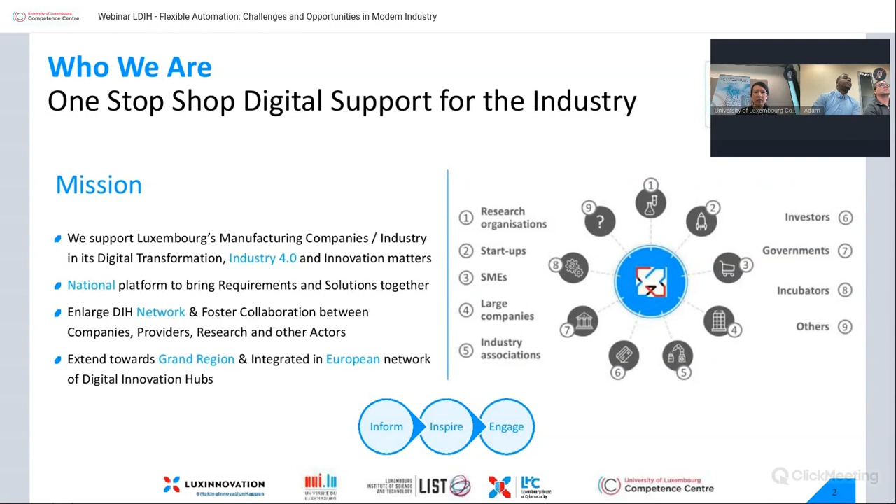Here we go. These are the list of services that we have in the LDIH project.

We have the digital maturity assessment, provided by the University of Luxembourg. We have the cybersecurity maturity assessment, provided by the Luxembourg House of Cybersecurity. We have the digital skills assessment, provided by us, the University of Luxembourg Competence Center.

We have the digital roadmap support, provided by Luxinnovation. The investment support is also provided by Luxinnovation. We have the digital industry training catalog, which we're going to show at the end of the talk.

This is provided by us, the University of Luxembourg Competence Center. We also have the test-before-invest facilities catalog, provided by the research institution LIST. And we have the LDIH marketplace, available at the website dih.lu. So let's see our speakers.

Now you have two cameras running. Yes, I'm... convenient, you have to mute yours. Okay, I think we are ready now. Okay, can you hear us very well?

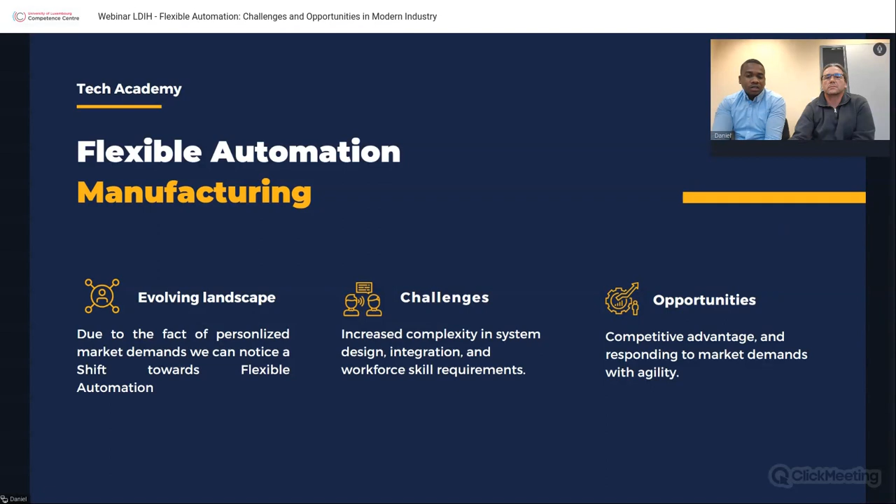Some years ago, not long ago, we started seeing a shift in how we think about automating processes. Point number one, I think, belongs to the past, where machines were designed and built to process only one, two, or three types of products maximum—where high volume and low mix was the norm.

Nowadays, as we've worked on these types of projects, we're seeing a shift—we're making automation much more flexible, where there's high mix and low volume production. You can process different types of products on one machine while still keeping control over your products. The future is uncertain, but surely it will be through the digital way.

I believe it's largely due to personalization—customers now have more personalized demands for certain products, and that raises demand for high mix and low volume. I believe that's the case. Also, the market nowadays is much more competitive.

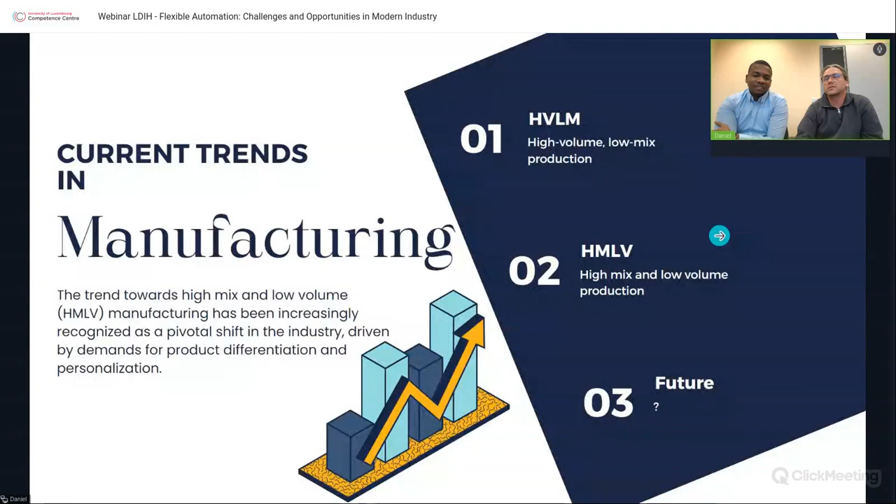We are being compared to many other companies, many other countries, continents in this case, and we have to be competitive. We need to be very flexible on this.

Here we're talking about the difference between small batch production and mass production. Conventionally, small batch production focuses on producing limited quantities, offering benefits such as customization to meet specific customer needs, higher quality control, and lower startup cost. That's debatable, but in some ways yes, the starting cost in small production is not that huge.

Depends on the product again. For mass production, it's a convention where you have a production line mainly producing 1, 2, or 3 types of products. It's quite rigid, but the cost per unit is quite low, meaning it's cheaper in terms of final products, but the starting cost is quite high. When companies choose between those two, they have to consider the budget, the cost, and the type of product they would like to produce.

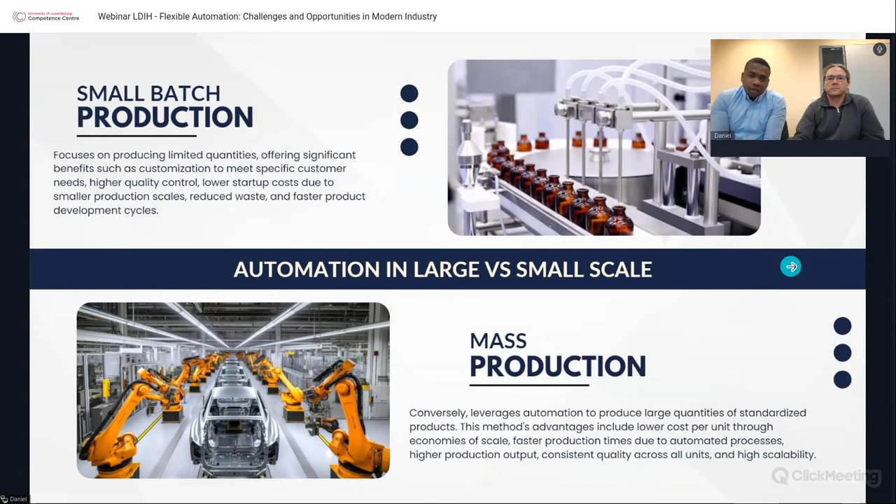Additionally, I believe digitalization has helped us a lot to achieve flexible automation and the ability to produce different types of products on the same line or different lines. For example, we have the SAP system, the ERP system, the digital twins. These are all features of digitalization that help us move from one production order to the next without losing data and without downtime. Sometimes it's just a click to change the planning of the production. I believe this has enabled us to reach a new height in production, increasing the efficiency of your production side.

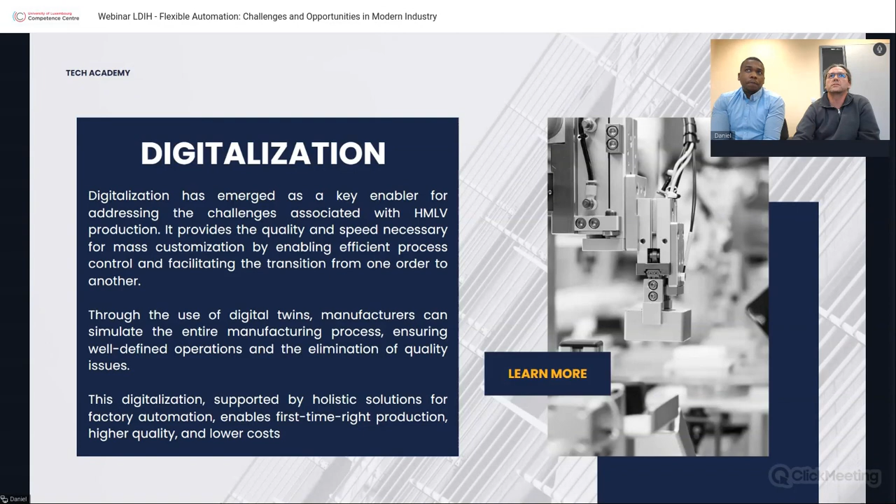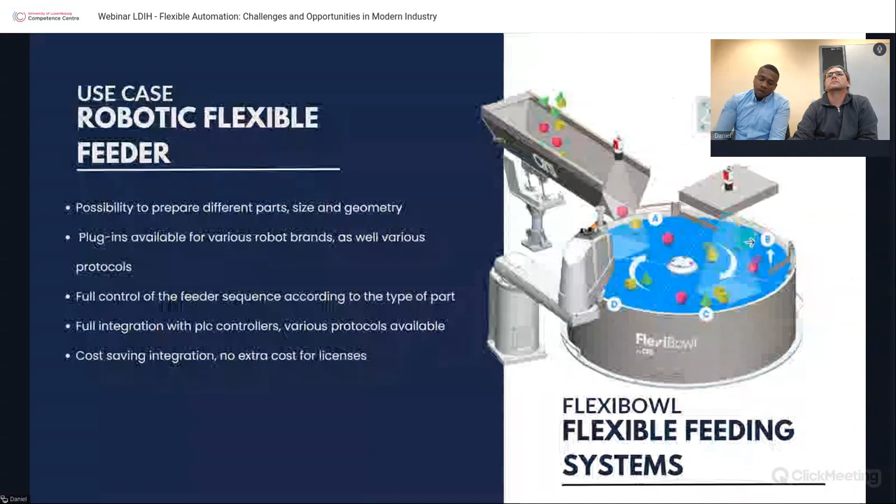The only difference between the two systems is that the previous one is rotary, allowing it to rotate, so the parts fed into the rotary flexible feeder will always come back under the camera in order to be inspected. This means those parts will always return under the camera in a rotary fashion, giving you the possibility to pick them up eventually, maybe after 2-3 runs.

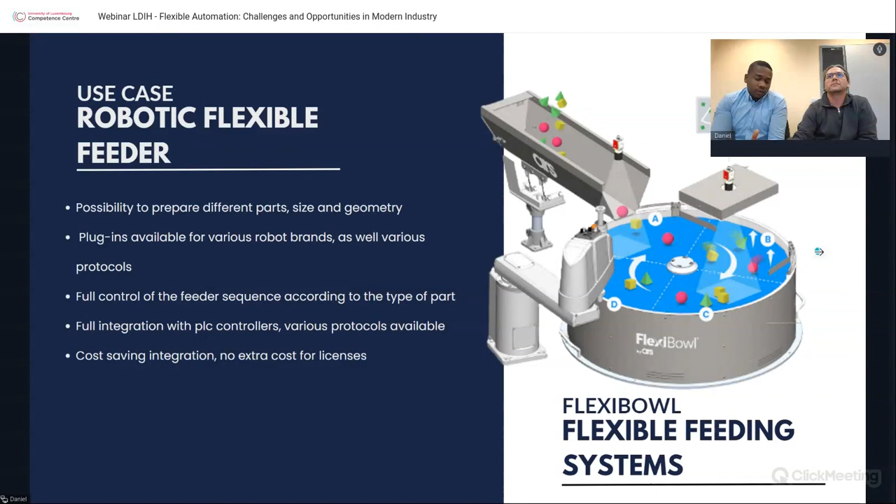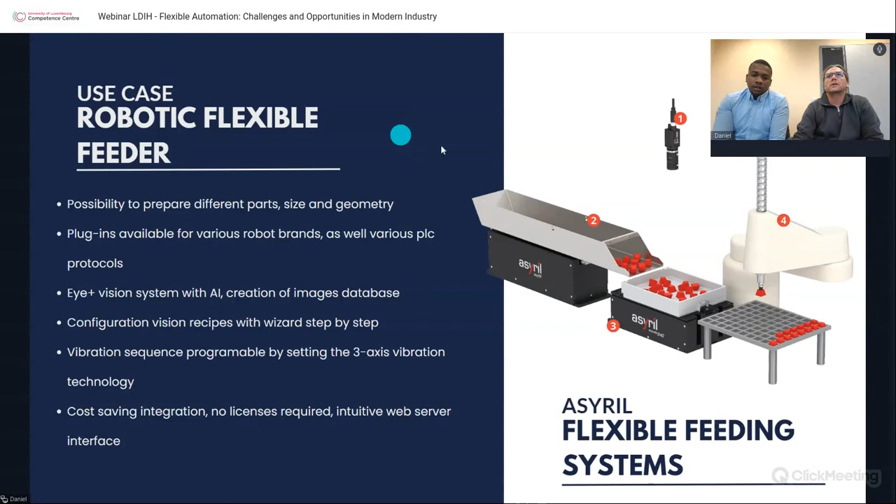Next, this is a use case where we will utilize that type of flexible feeding system. I'll briefly explain the project and what the outcome is supposed to be.

As you can see on the left side, we have different types of caps and cork systems, and the idea is that we would like to assemble those caps and corks together. You also see the finished product with the bottles, which is small, but that's the finished product. These are not the full range of cork types we're feeding into the system, but that's what we have for the moment to show you.

We can break this project into four parts. We have the cork feeding system, the assembly line feeding system, and in the middle the Mikron machine where you're actually assembling the caps and corks together. Lastly, we have the work rest station where you're feeding the caps with the work rest that carries the caps. We'll see that in more detail.

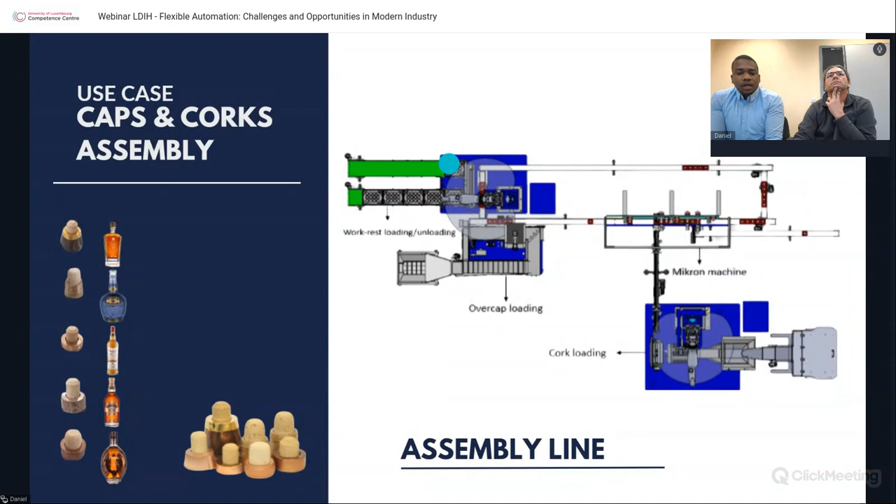If you look deeper into the cork feeding system, what you see is the elevator, which brings the corks into the hopper and then the vibration tray. The vibration tray vibrates in a specific configuration and sequence in order to rotate the corks into a desirable, pickable orientation. The original plate that came with the Asyril was actually flat.

The problem with that is once the corks fall into place, they keep rolling. So if you snap a picture, they could be in the right, pickable orientation, but they keep changing their coordinate position, and that is a problem. For that, we had to design different types of plates with grooves that allow the corks to fall into place.

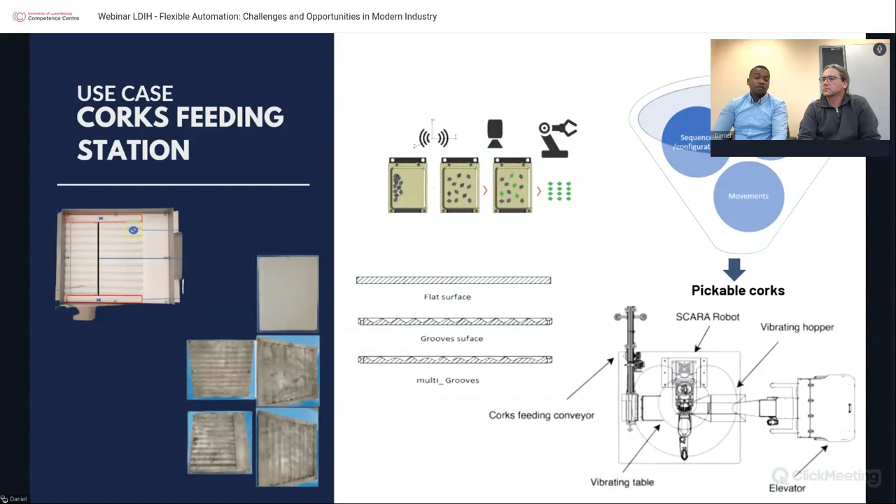That also helps because different types of corks have different sizes and dimensions, and we needed to design 5 or 6 types of plates to accommodate them. We also had to change and play with the type of motion and sequence in the Asyril in order to achieve a high output of pickable corks in front of the robot's camera. Without that, we didn't have enough parts presented under the camera that were actually pickable for the robot.

Next, we're going to see a video that shows you the final project.

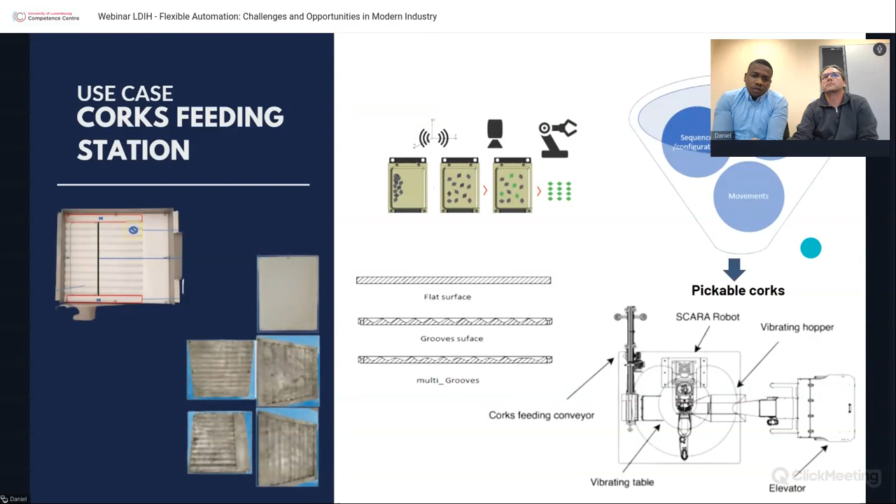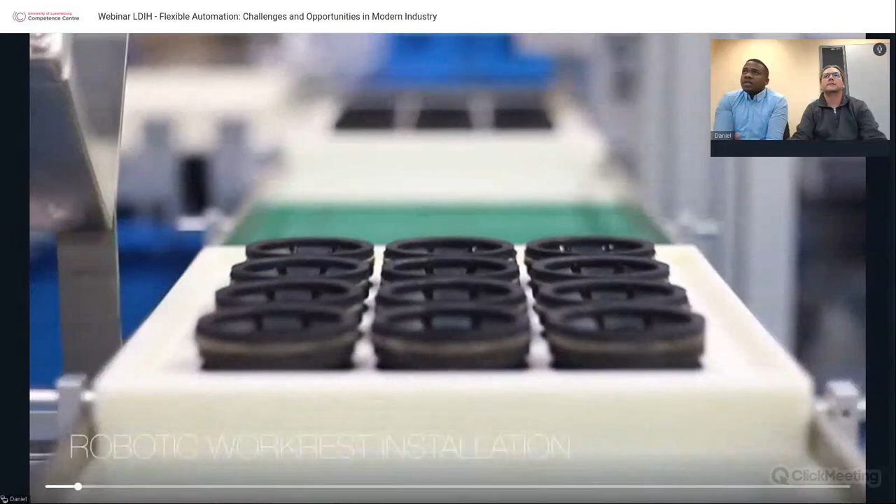System, and then we take the workrests and place them into the carrier.

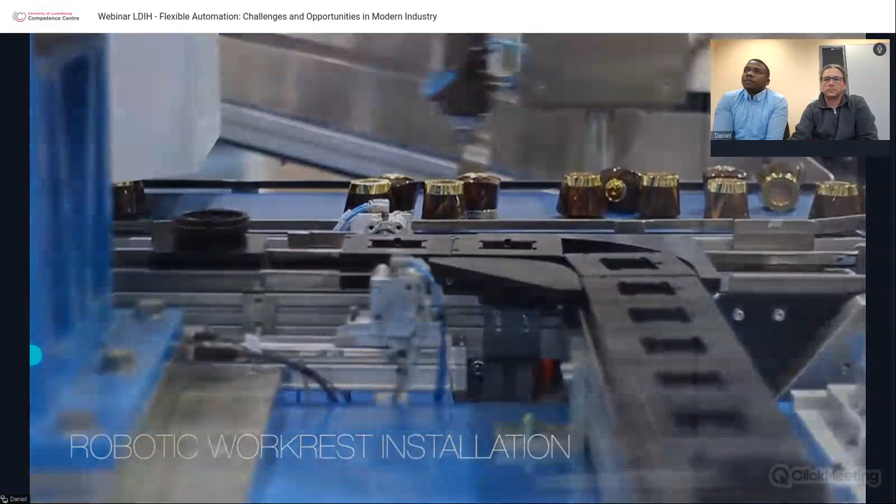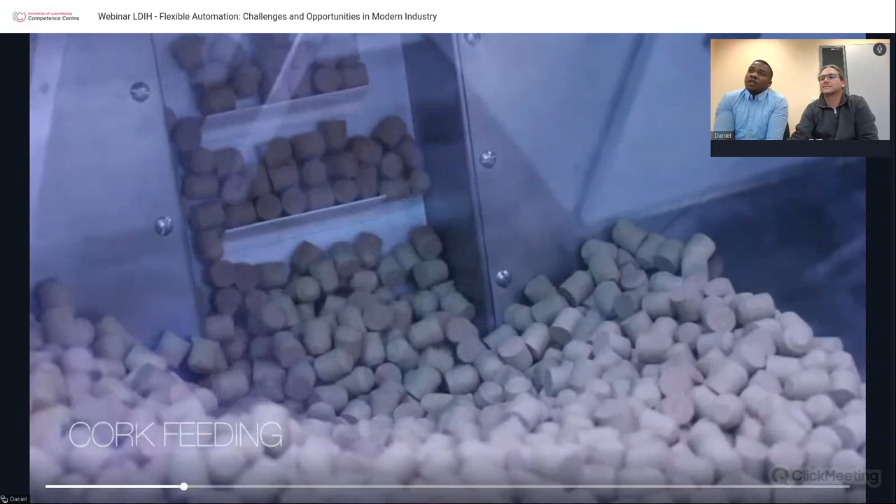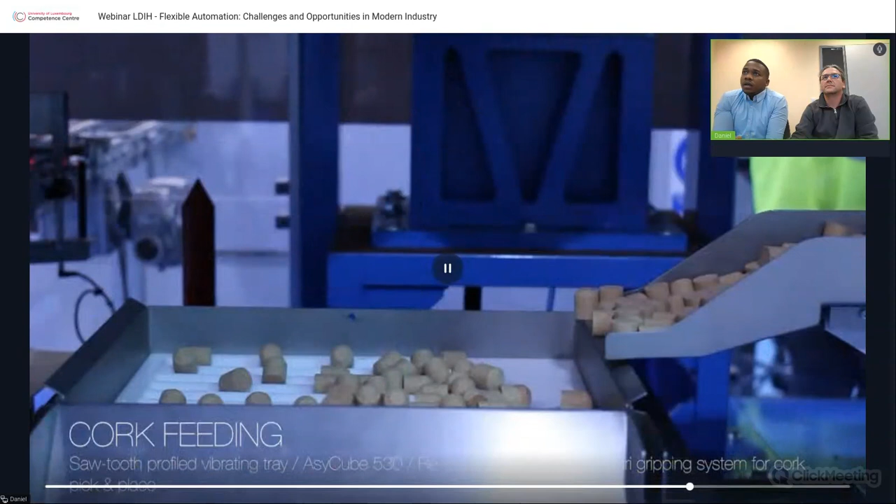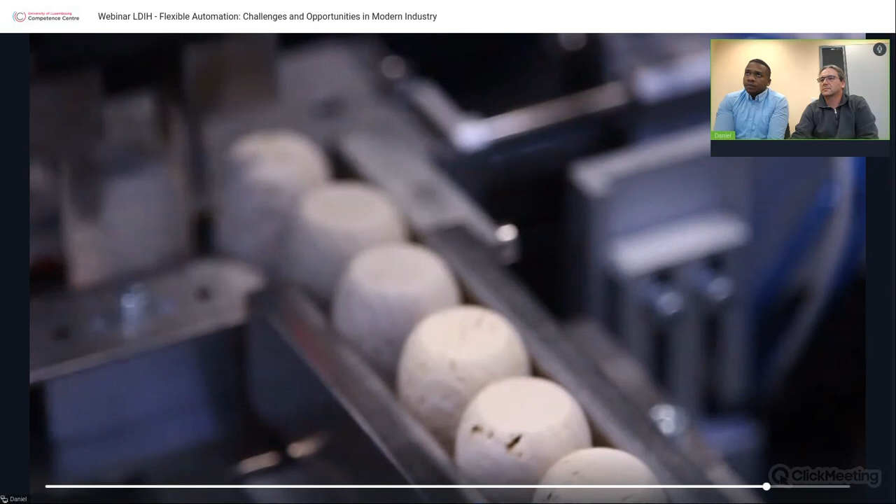Here we have the elevators transporting the corks into the vibration tray. The tray vibrates in order to bring the corks into a pickable orientation. The robot picks up the corks and places them into the revolver. The revolver then pushes all the parts into the Mikron machine, ready to be assembled with the other parts. On the other side, we have the caps, and an elevator that brings the caps into the conveyor.

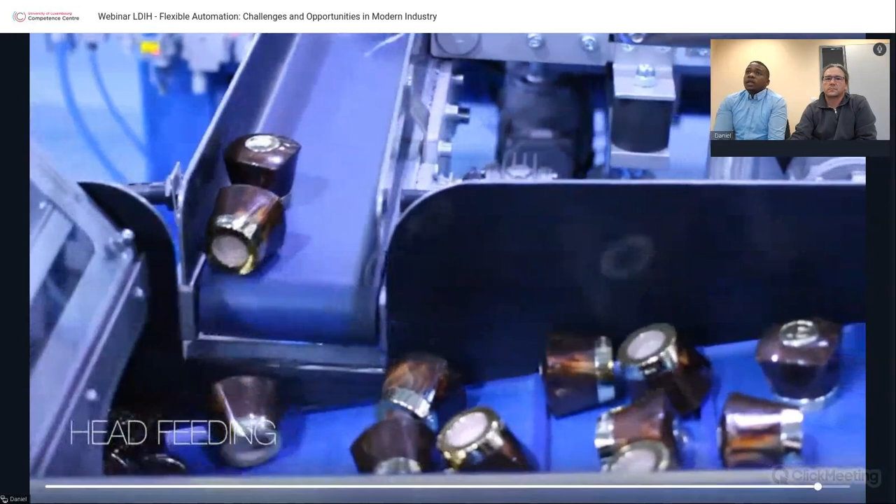Once the caps are under...

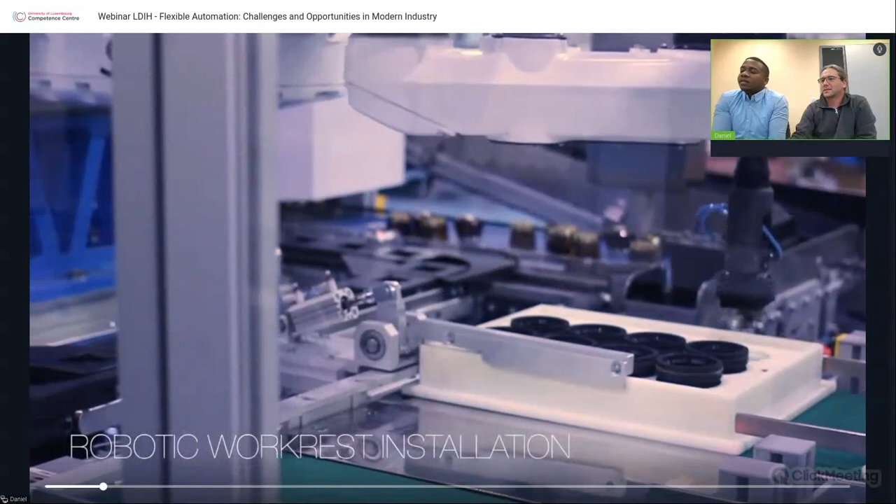Oops, yeah. You were started, no? Yeah, let's just start from the beginning. We're sorry for the inconvenience, something happened there, made it restart. Something is happening with the video, it's lagging, I believe.

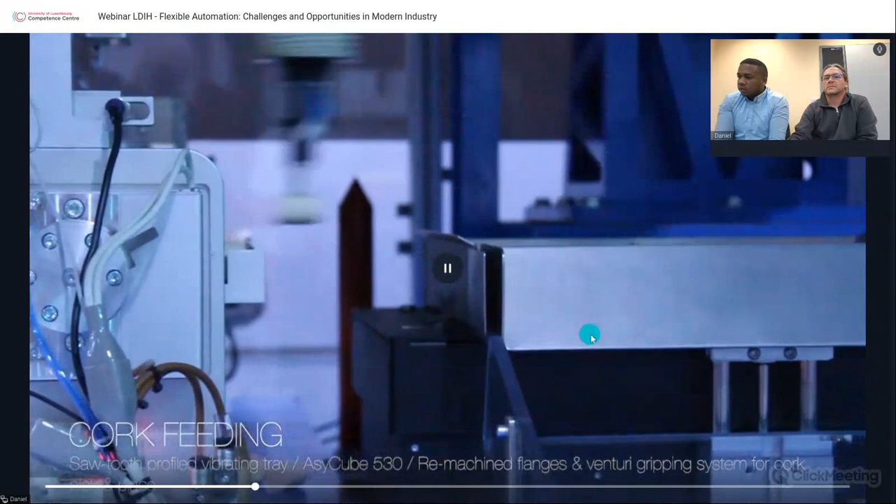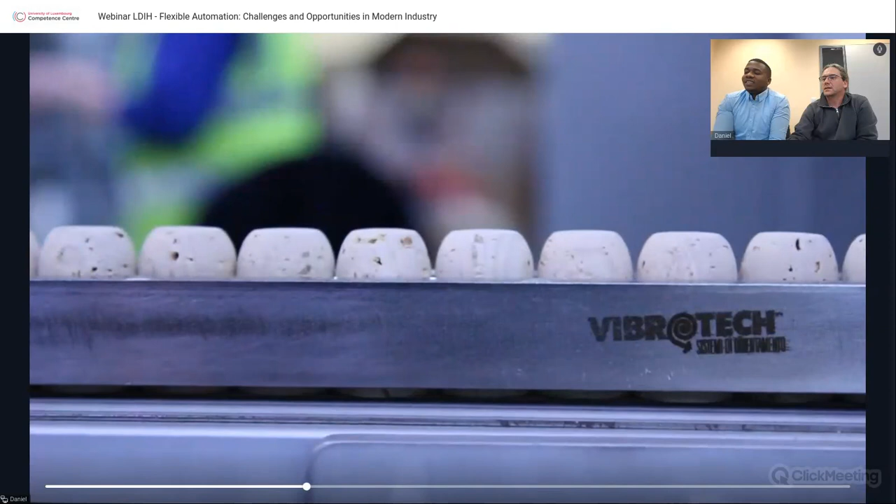Get to the cap station. I hope so. If not, we just carry on.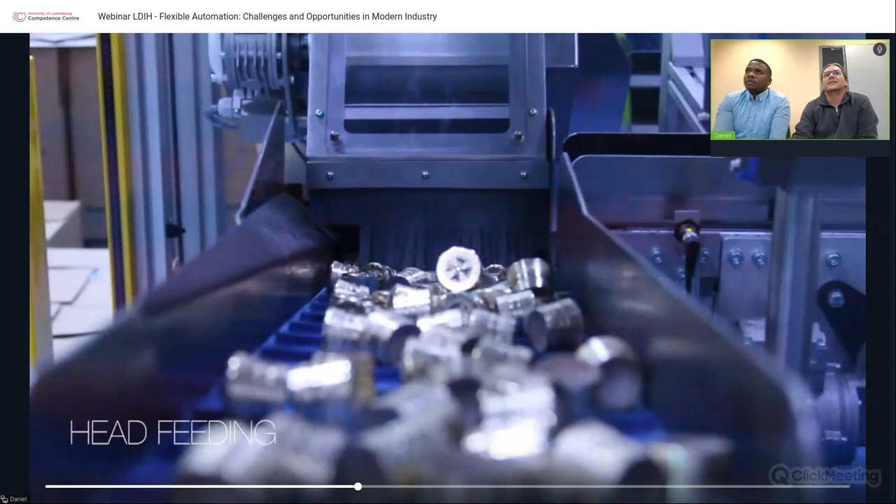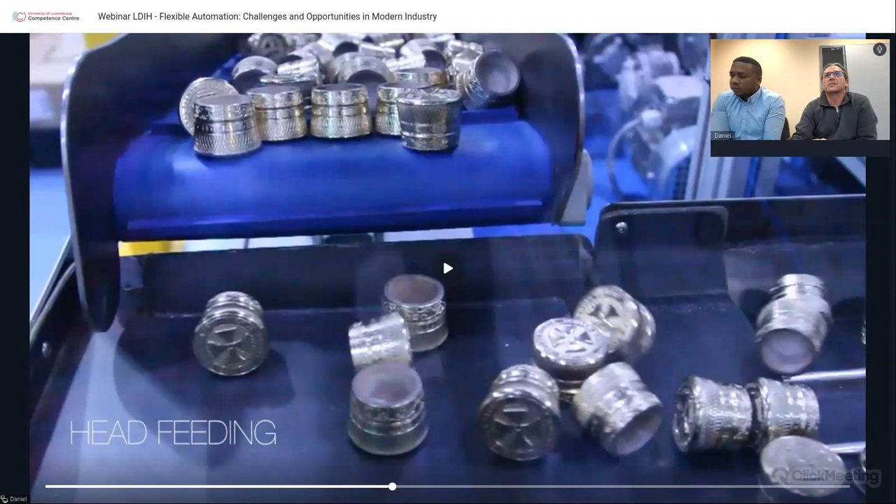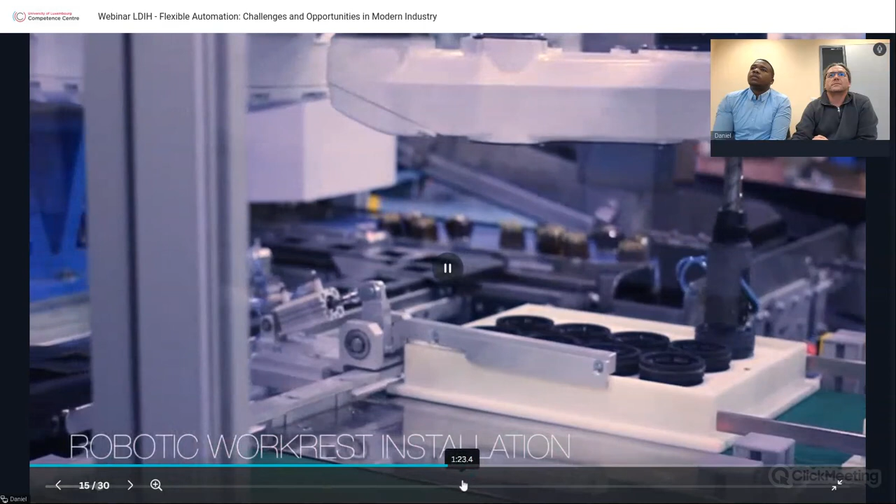No, yeah, for some reason there's definitely a problem with the video. We will try to play it back again at the end of the session. Exactly. That is for some reason, yeah, it's that. Video we can, I can. Okay.

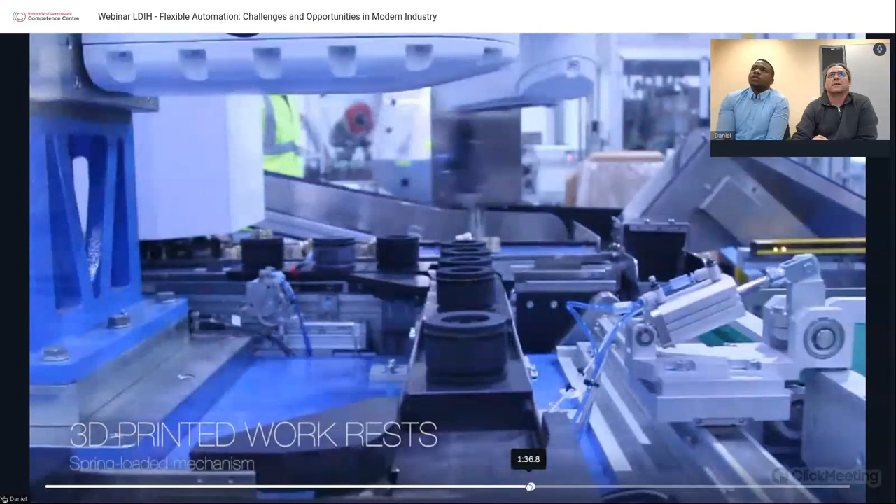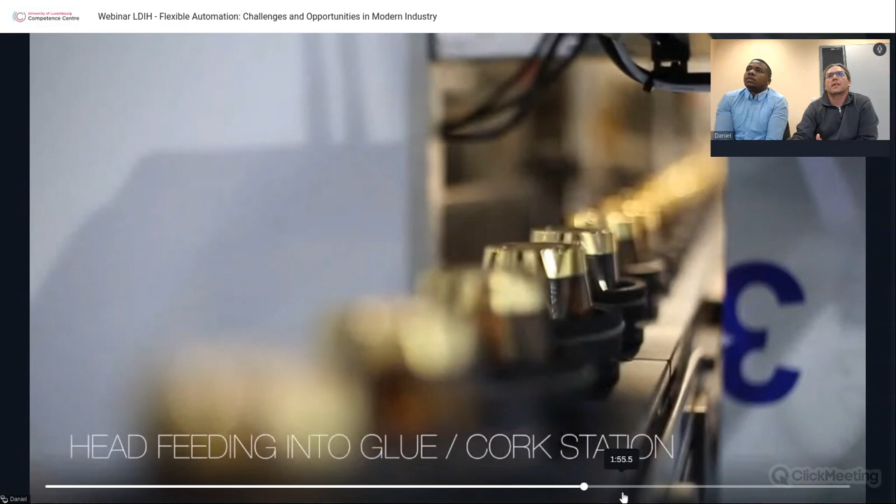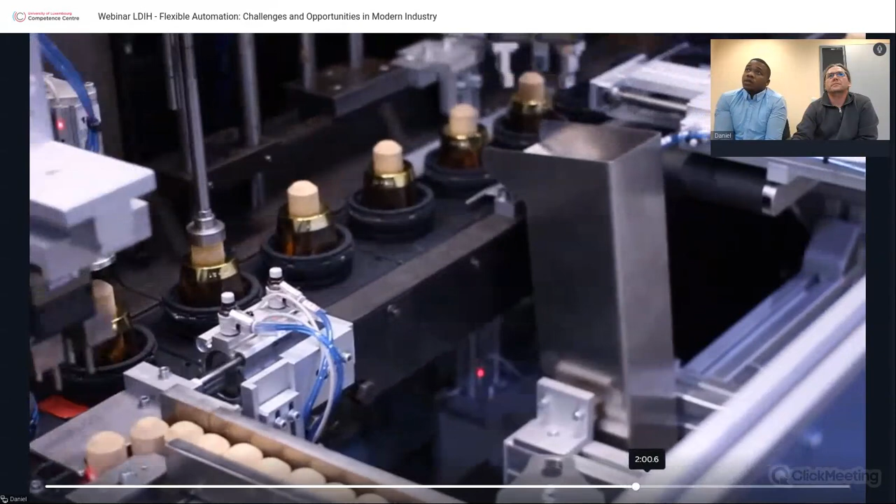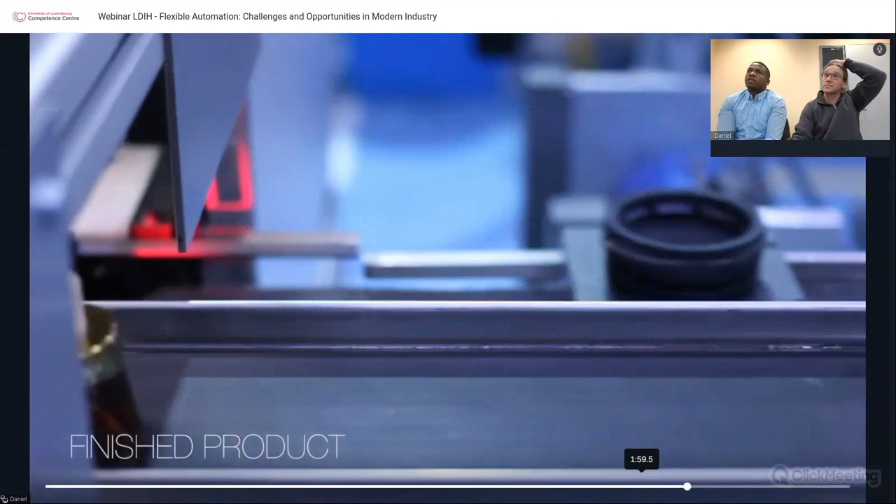Sorry for the inconvenience with the video, but yeah, we can change. Well, let's see if we can proceed to the next slides. Yeah. Dun, dun, dun, dun. This one. Okay. All right.

Yes, we are. So in the next slides, I'm going to present a project, I think the latest project that we worked on when we were at Guala. This is another flexible feeder that we developed with Guala for our headquarter company. This machine is actually running in Alessandria, the headquarters of Guala. We already witnessed this year that this machine is still running, so we did a good job, I can say that.

But before celebrating so much, I'm going to give you highlights of what were the specifications to build this machine and how we based the design of this machine. So this is this flexible feeder. Its main goal was to process high mix, low volume, as we already discussed before.

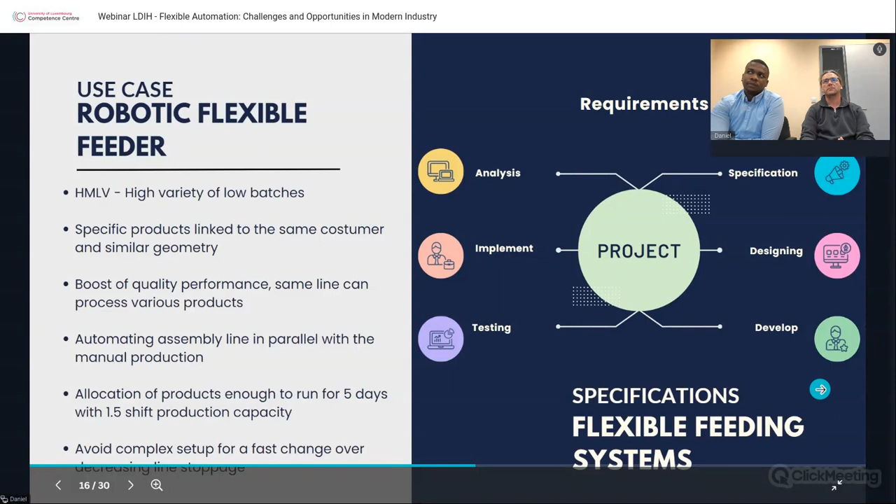So the analysis from the requirements given to us is that all the products were round shape, of course with different weights. Some of the products were plastic, others were made of Zamac, a kind of metal alloy. The internal depth was varying. So we needed the robot to have the flexibility to understand what kind of product was to be picked, and what kind of tool we had to find to pick this group of products.

So we came up with two solutions. One was a gripper with 3 fingers, and the other was a vacuum. Why couldn't the vacuum pick up all the products? Because the suction cup was not small enough to enter inside all the products. Some of the products had an internal diameter smaller than the diameter of the suction cup. On top of that, we had to select a special suction cup due to the roughness these cups have internally.

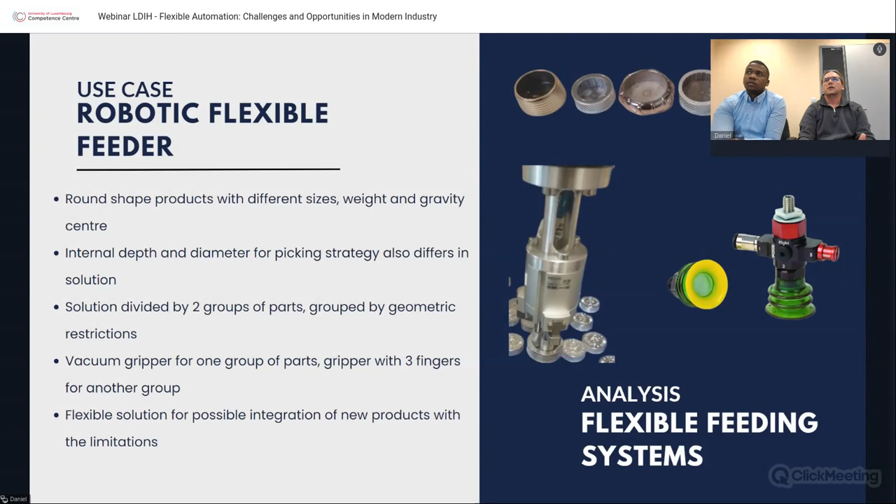And the solution is, we're going to see in the next video. No, not yet, sorry. No, go there.

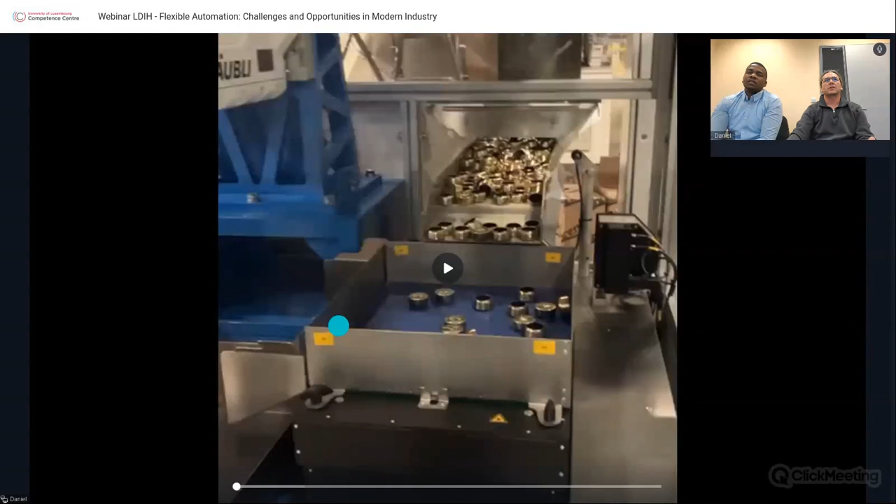So the solution we came up with was the layout of this flexible feeder: we have a robot in the middle with 2 parallel feeders, where the robot can pick from one of the sides, while at the same time the other feeder is preparing the parts to be pickable. So when the robot finished one of the sides, the other feeder was ready to be pickable. In this way, we could achieve a rate of 45 parts per minute at maximum.

With ideal conditions, we achieved these 45 parts per minute. To reach 60 parts per minute is very challenging, as you'd have to pick 1 part per second. So it's something we sometimes think is feasible, but even with the fastest robot we implemented here, it was not possible due to various constraints.

We choose to use one of the Asyril solutions. This type of feeder could help us customize each product, customize the vibration of the platform. At the same time, it came with an integrated vision system with AI.

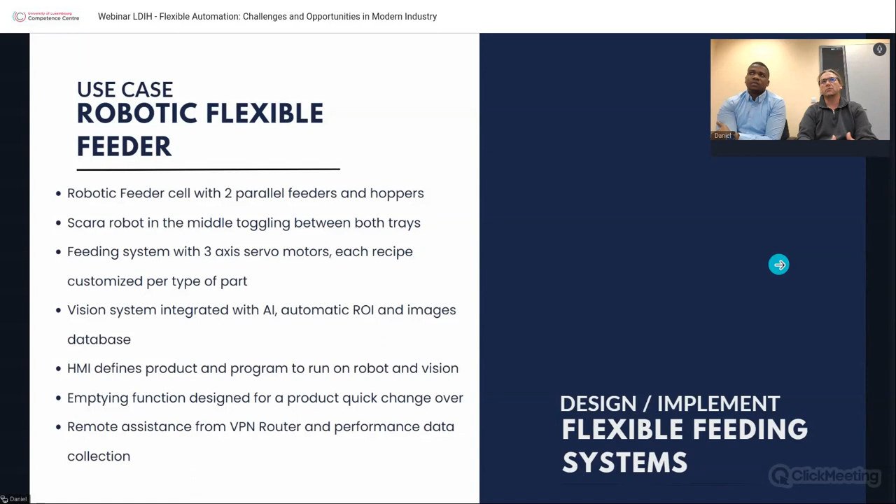The next video will show you the solution for caps.

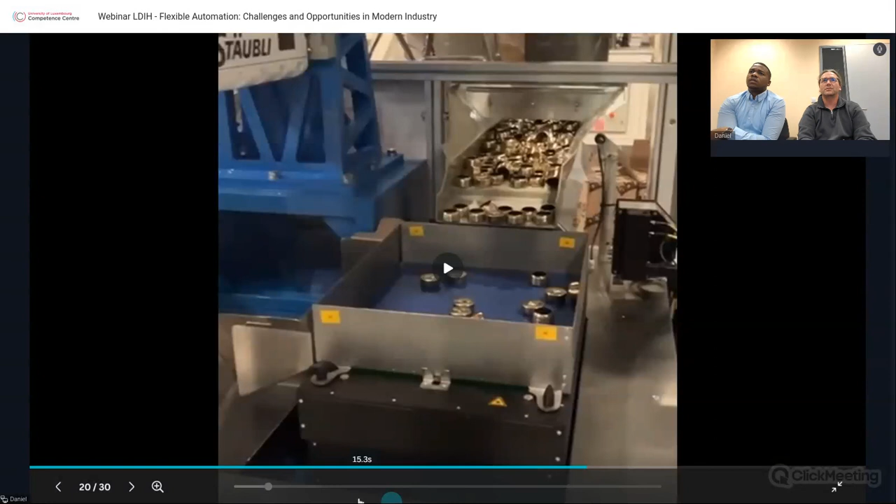As you see on the right side, you have this Asyril. It's stopping for some reason, I don't know why. He wants to play with us.

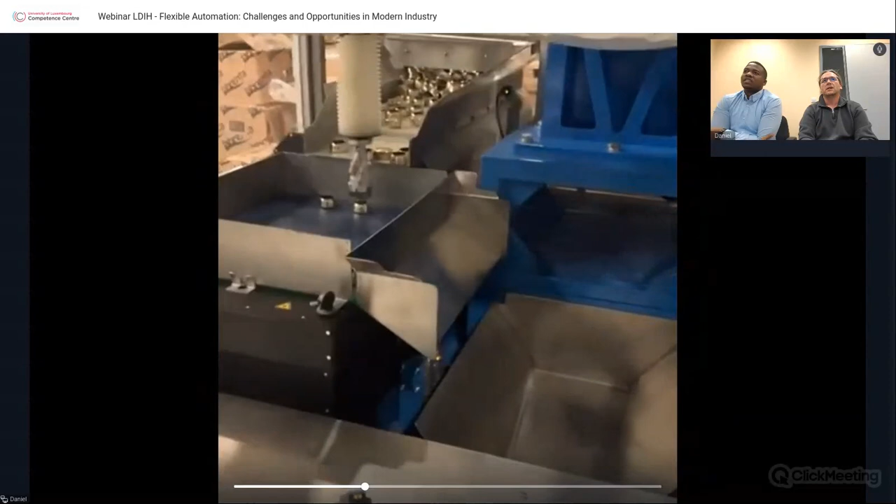On the left side, this was already prepared while we were picking on the right side. So once it picks all the parts available on the left side, it goes to the right side because they were already prepared in advance. Now we cannot see it, but the left side is being prepared.

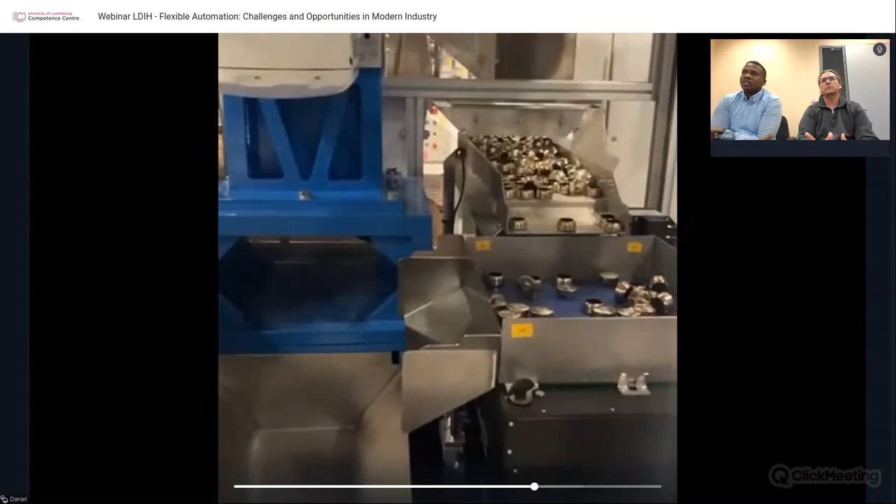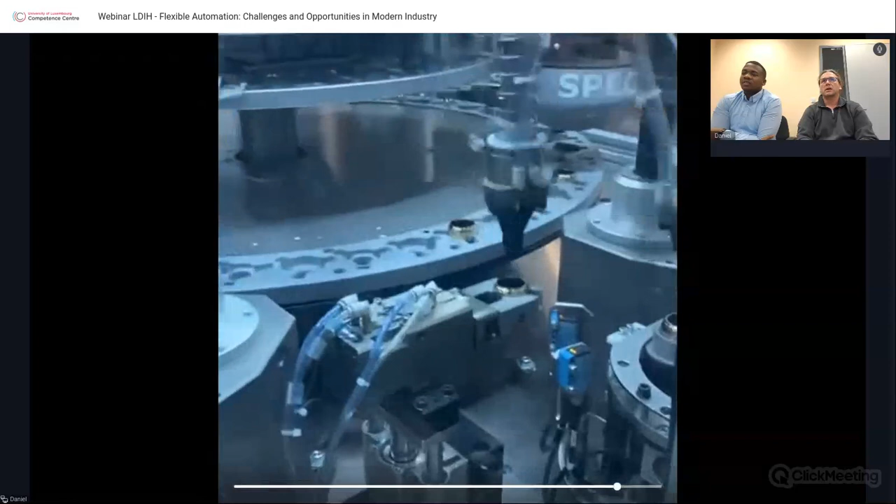On the back, there is a hopper. This hopper is also smart, but basically controlled by the vision system. Why is it smart? Because it knows how many parts are present on the tray. If it knows you have 50% of parts on the tray, it knows it has to feed only the other 50%, to avoid having too many parts on the tray, otherwise it becomes impossible to pick.

During the commissioning phase, this was a surprise for us because we never encountered this type of product before, a product with a cork in it. So it has a T shape instead of a U shape. This was a challenge for us while we were commissioning the machine over there.

Well, we didn't give up. Of course, we had to help them in a certain way. That's okay, let's see, and then we took this type of sequence. So we analyzed how we could feed this product.

The first thing you have to do is understand the gravity center of this product, how it behaves when it falls to the platform. Then you have to run some images from the vision system to understand what it is seeing, and if it's repeatable.

And the last but not least, and the most important one, is whether the tool is capable, which tool is capable to pick up this product. We try not to use a new tool, because otherwise we're going to make the changeover more complex.

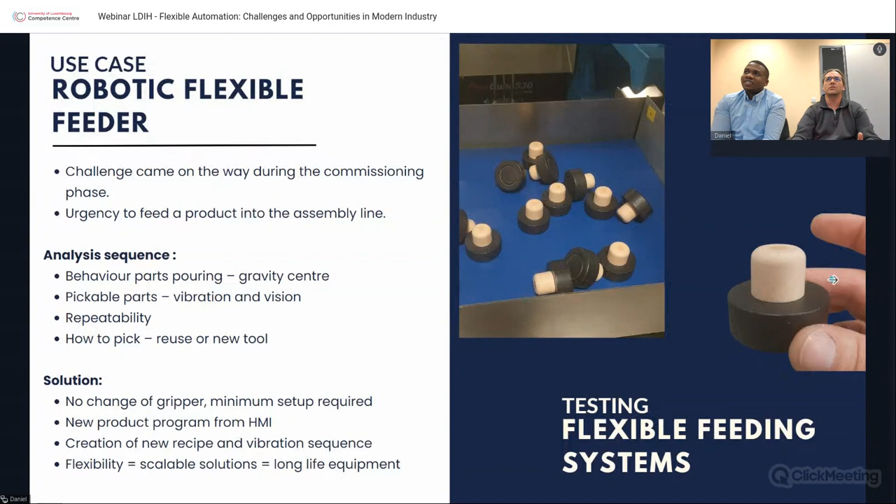Automation, yeah. So this is quite an amateur video that you're going to see, as the other one, with the final solution, but it's interesting. That's why I'm playing with you.

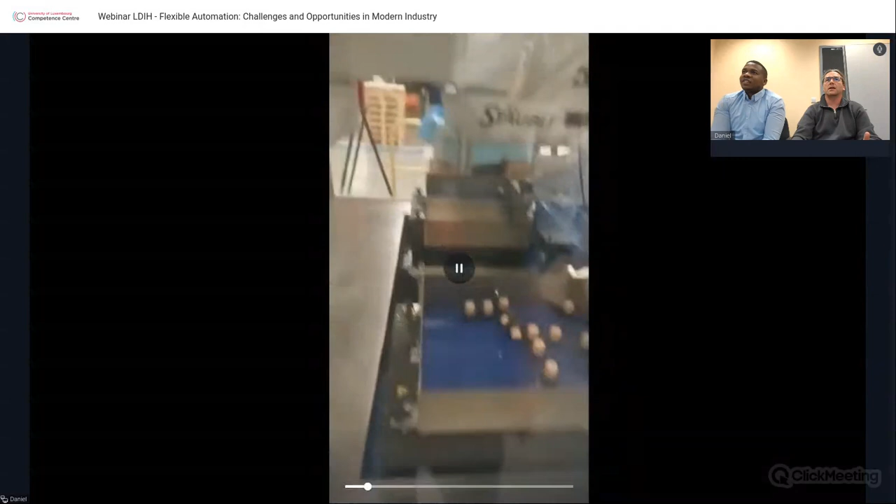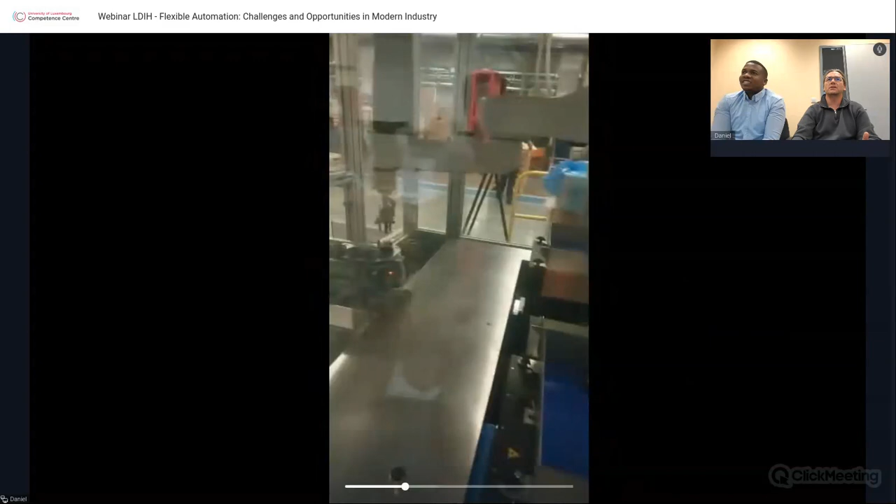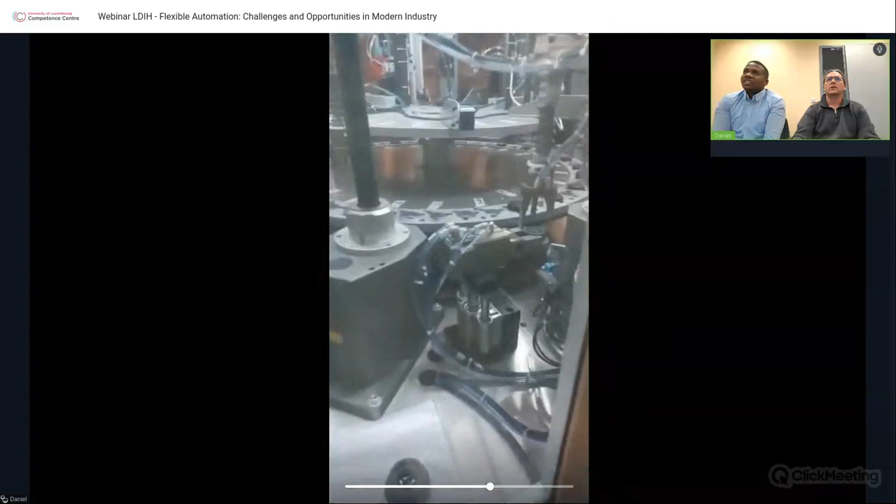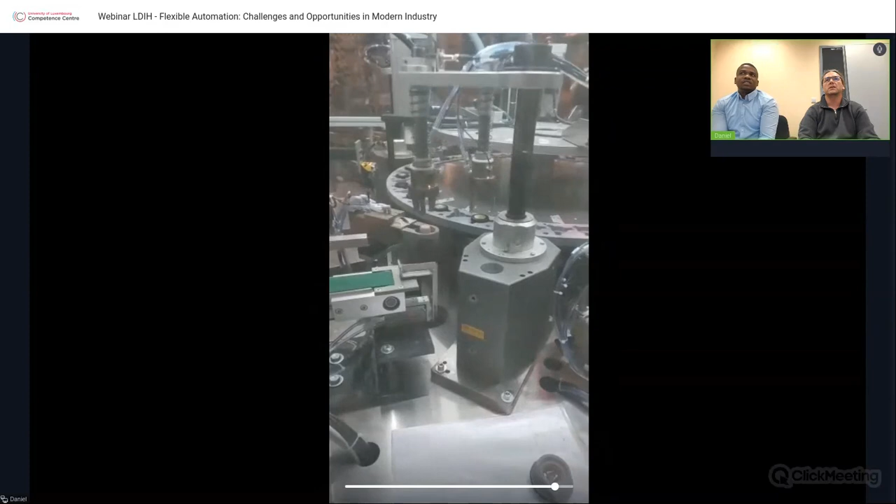As proof, you witness that the solution we came up with works very well, no problem. At this moment, the robot was running at 75% or 50% of speed. I think we came up with a good solution in this way. Also, the assembly machine next to it that was prepared is also very flexible. This was quite an interesting project where two flexible machines were put together.

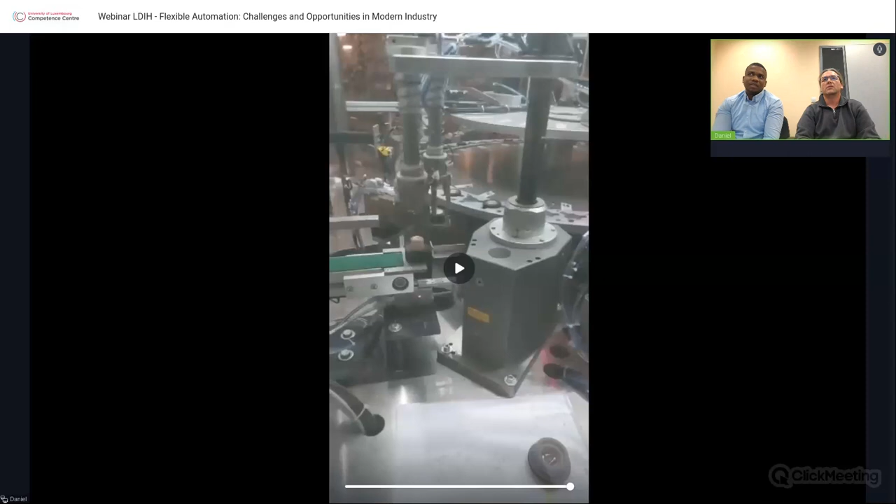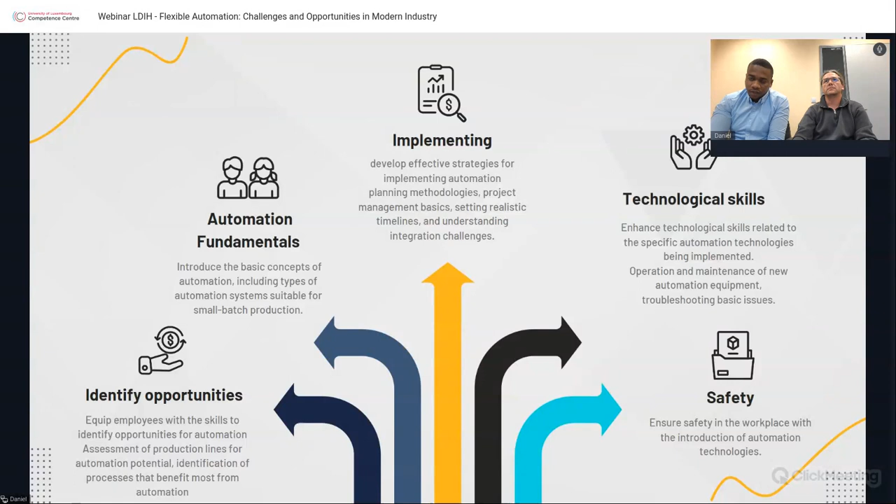All right, I don't think we have much time left, so I'll summarize quickly. This slide is mainly about the skills necessary to put all of those things together. The first is being able to understand the fundamentals of automation, what simple automation is, and the basic concepts. That enables you to go to the next step, identifying opportunities for automation, meaning being able to spot areas and processes that can be beneficial to automate, as we discussed earlier. Then it comes to technological skills, meaning you need the labor and workforce skills to put all those technologies together. Last but not least, implementing and commissioning the final solution and doing the last tweaks. And with that comes safety, which is quite important - not just the safety of operators, but everybody around in the manufacturing or production side, understanding how those machines operate and the safety risks associated with them.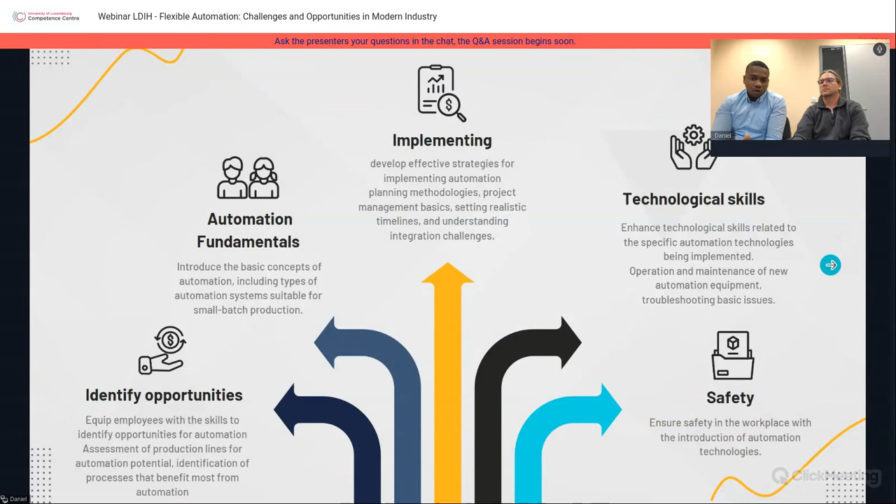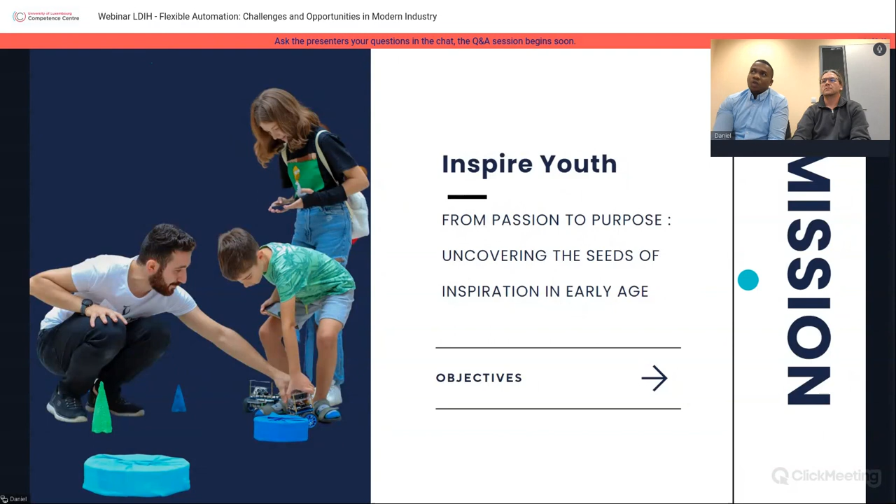With that, we close the topic of flexible automation and come to what Tech Academy has to offer. I'll go through this briefly. Tech Academy is here to provide robotics workshops and robotics training to the public. We also provide robotics workshops to the youth, because we believe we need more engineers and automation engineers from an early age, so we'd like to spark this genuine interest.

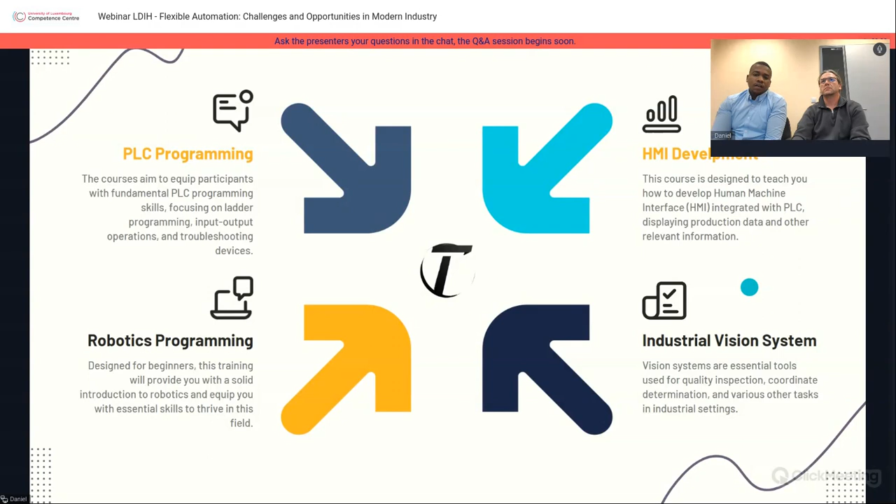This is the area we focus on. We're providing robotics workshops and the vision systems associated with robotics. We're also currently building PLC programming and HMI programming courses together. With that, I believe we've come to the end of this webinar. I'll move to the Q&A since time is a bit rushed.

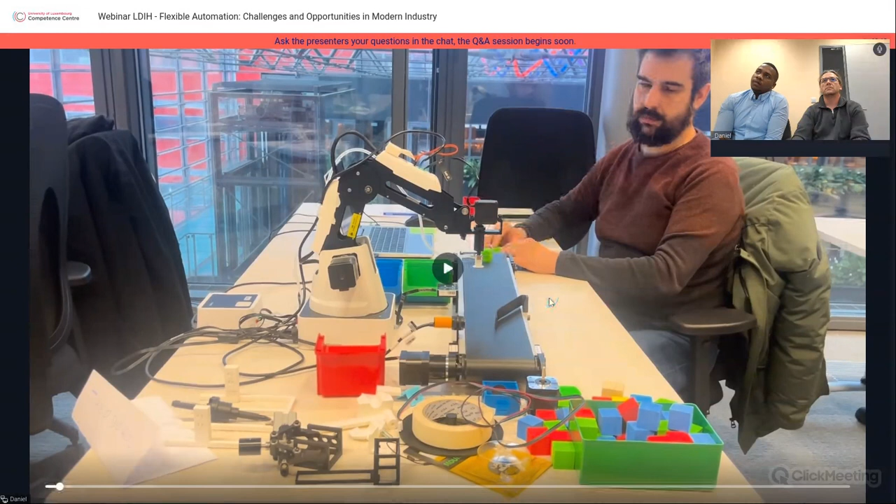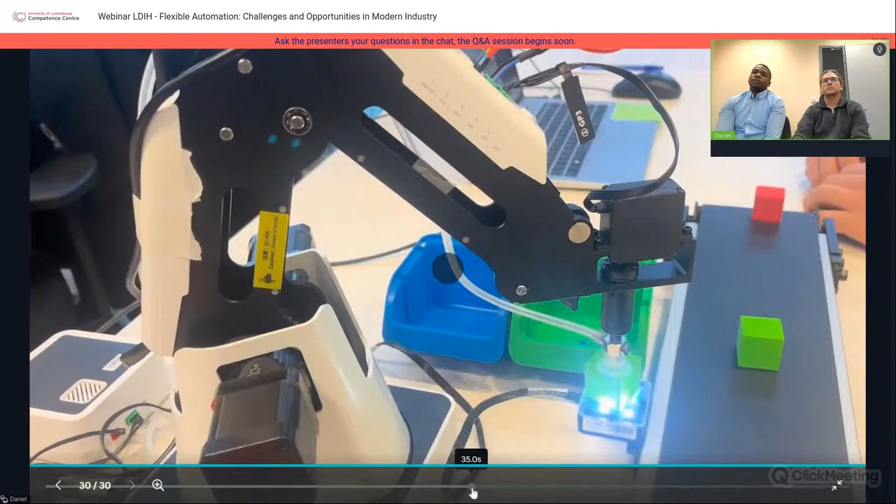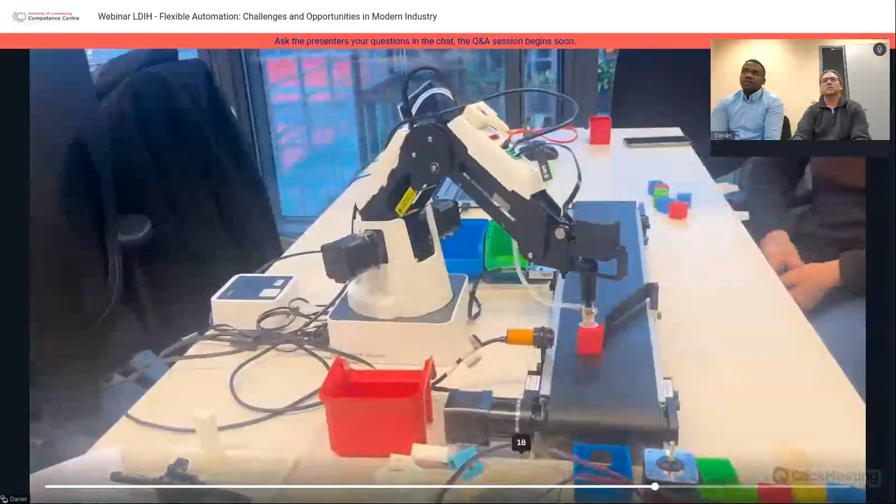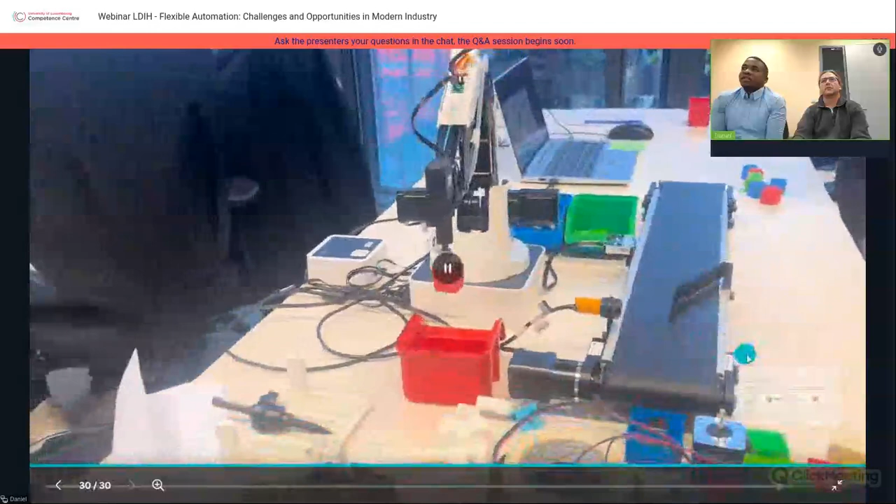This is just a final video showing a bit of what we do and what students learn in the classroom. We're mimicking a production cell here where students can work with robots, vision systems, sensors, and conveyor belts. The exercise you see is sorting cubes based on colors using an automatic sensor, suction cups, and color sensors. This is the base - from here you come up with a very complex solution. This is the starting point, just to give you the way of thinking.

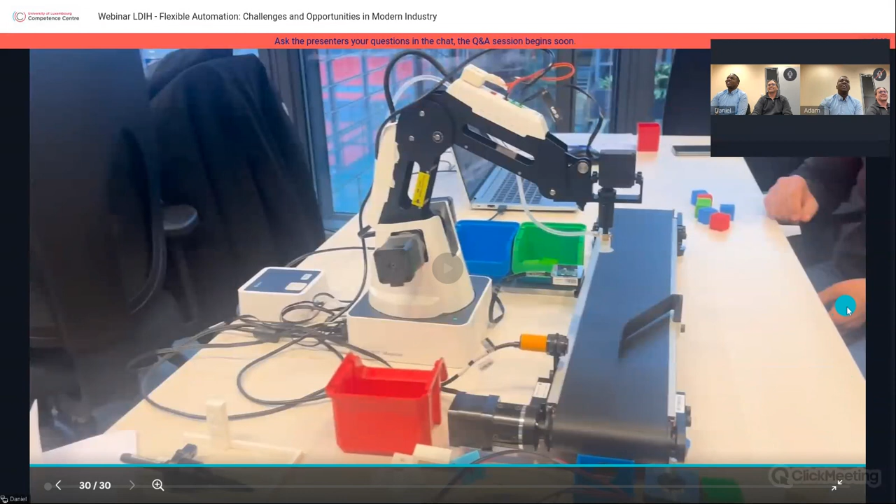Yes, we enjoyed your presentation and your videos very much, they are very interesting. Like what you can see here... Hello, oh, it's still sharing. Yes, okay. Can I hear - yes, she's over there. Can you hear me now?

Now the Q&A mode is enabled, so do you have any questions you can ask here? I have one question - what programming language are you using for this application? Can you hear me? Yes, very well, okay. I just have the question for myself: which programming language do you use to control the robotics automation?

It depends on the robot you're using. For example, the ones you see in front of you were from Stäubli, and they use VAL3 to program. It resembles Python - the syntax is similar to Python mainly, it's quite a generic language. So basically, if you're able to code in a generic language like Python, you'll be able to understand the syntax and programming language of Stäubli. Fanuc is also straightforward, ABB is the same. Kuka can be a little more complicated because they use C++.

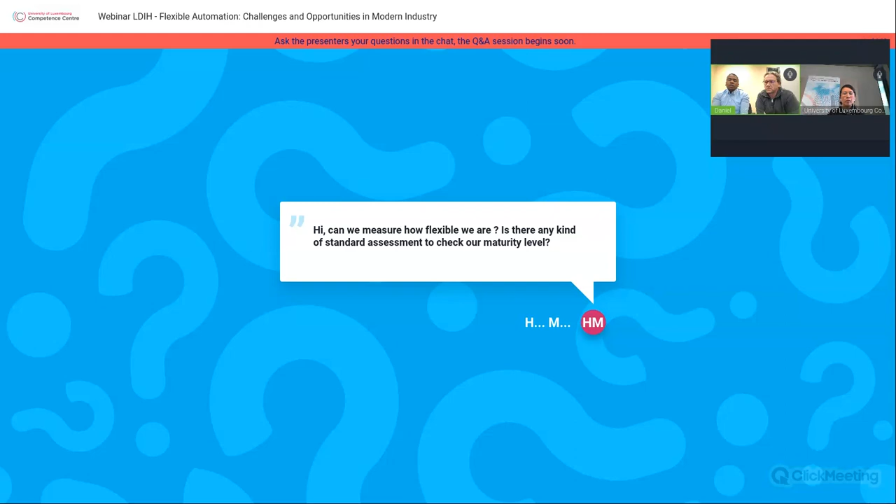And if you are able to change with minimum required changes, maybe just refocusing or adapting new libraries, you could say that you are mid flexible.

But if you need to do a lot of tweaking and adjustment for your axes, and you have to completely reteach the machine, then you are not flexible, or low in flexibility. You say straight away that I'm not flexible enough to accommodate these changes or this type of product.

It can also be a product that has certain characteristics that have nothing to do with the other products the machine is able to process. In this way, you may have to redesign the machine so it can accommodate this type of geometry, the type of product you want to process on that machine.

Thank you. And we have another question: is there an impact on maintenance, reducing downtime by how much?

Well, I believe there is a huge impact on maintenance. I would say not in the downtime, because it depends on how well the system is integrated. But in terms of maintaining the system, you would need quite skilled labor.

Imagine you are maintaining a small machine with servo motors and just conveyor belts, and that's it. Now we're integrating vision systems, robots, complex PLCs, maybe an industrial IPC. The maintenance here becomes quite complex, and the challenge becomes how good and skilled your maintenance team is.

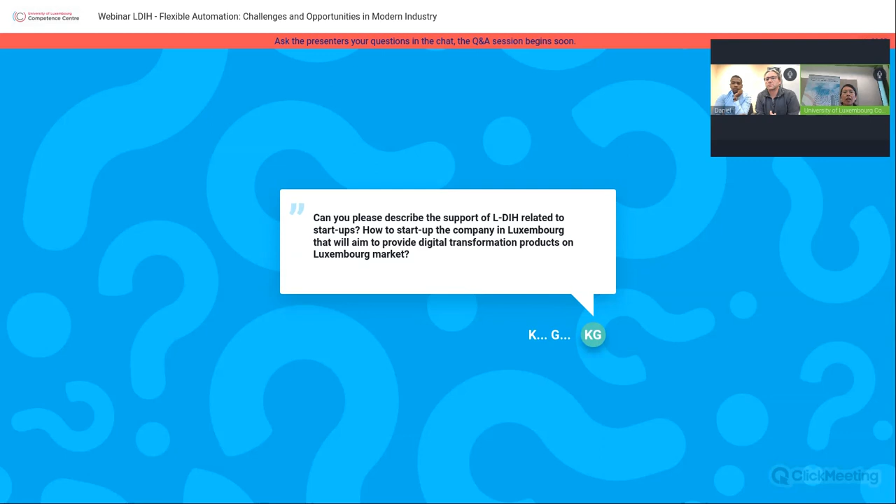Can you please describe the support of LDIH related to startups, how to start up a company in Luxembourg that aims to provide digital transformation products on the Luxembourg market? We have many services, and at the end of this talk we're going to explain the list. At Luxinnovation, they have a startup department that can help startup companies. When you see the list of services, you'll see how we can help you start the company. So please stay with us, and at the end of the talk we'll see the list of services. For startups, please contact us, and we'll provide you the right contact to support the startup company.

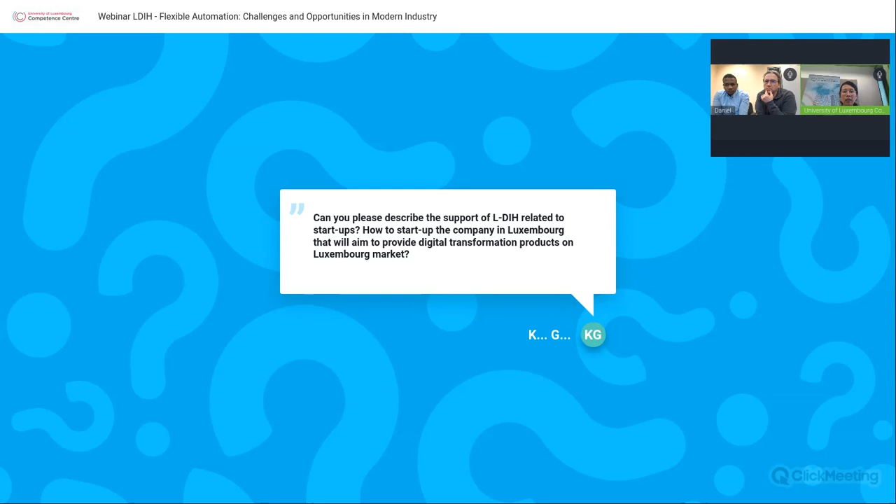I think this is the last question. Now we're going to go back to the list of the services of the LDIH project that can answer your last question. Let's go back to our presentation, and we're going to see the list of the LDIH projects.

We have the digital maturity assessment, provided by the University of Luxembourg. The cybersecurity maturity assessment by the House of Cybersecurity, digital skill assessment by us, the Competence Center. We have the digital roadmap support, provided by Luxinnovation. Investment support, you can see that one.

This one is the service for the startup. If you're interested, please contact us, and we'll bring you into the part of how you can invest in your startup company. So we have the digital industry training catalog, with our course training catalog.

I have a question about the automation training. Do we need to know coding in advance to take your course? No, not necessarily. We have courses from beginners all the way to advanced, so we take you all the way even if you don't have any knowledge in robotics or automation in general. So basically everything is included in your training, right? Yes.

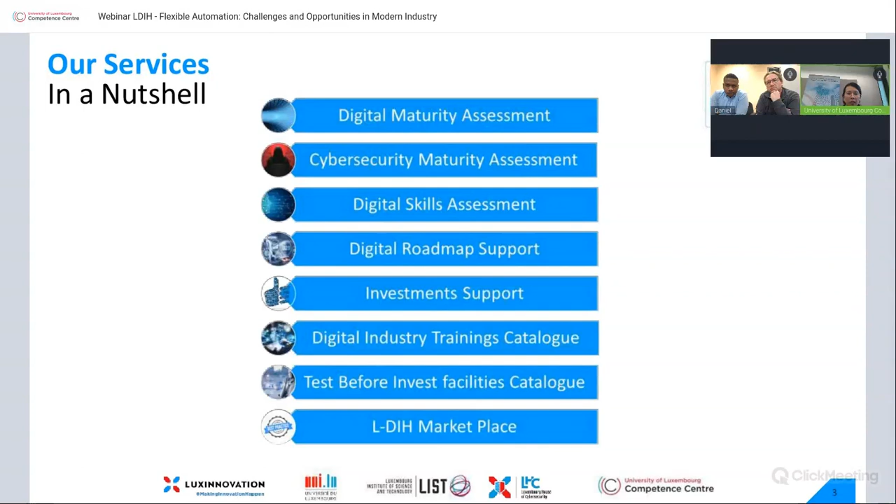And then we have the test before invest by LIST, and also we have the last one, LDIH Marketplace, that provides you all the support to transform your company through digital transformation. So let's get into our service at the Competence Center.

This service is provided by us, the University of Luxembourg Competence Center. We provide digital skill maturity assessment to companies. The aim of this assessment is to assess and understand the company's current level of digital skills. The assessment is available in many languages: German, English, French, Luxembourgish, and Portuguese.

This assessment is divided into two main parts. The first part is general digital skills, where we have a list of skills for the assessment, and then we have the emerging technologies part. For emerging technologies, we have a list of new technologies, and we can assess if your company or one of your employees is interested in one of these technologies. If they're interested, we provide training roadmaps into your company.

If you're interested, the contact is here - you can email us at ldih@competence.lu, or you can email me at jarwan.misit@competence.lu, or email my colleague Thomas Benz at thomas.benz@competence.lu. Next, we have the training catalog, the new version for 2024.

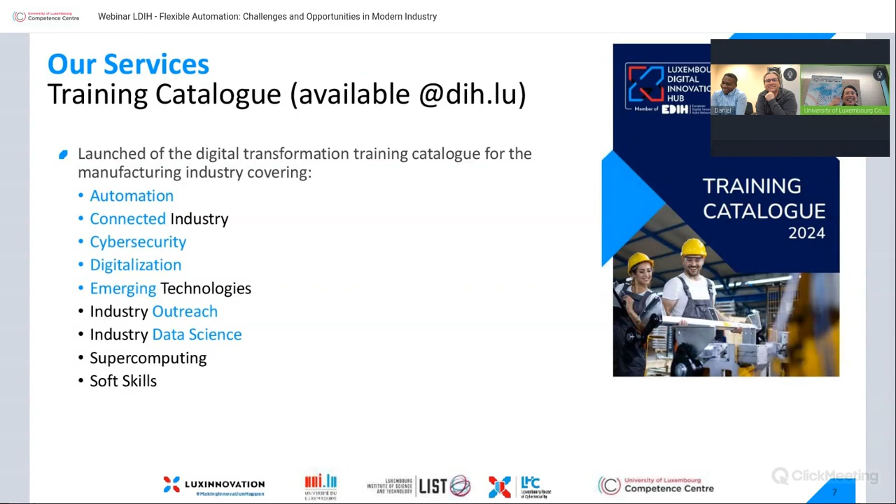Will do. Yes, and look for your course, right? Automation. Okay.

We have included all the training providers, training partners into this training catalog.